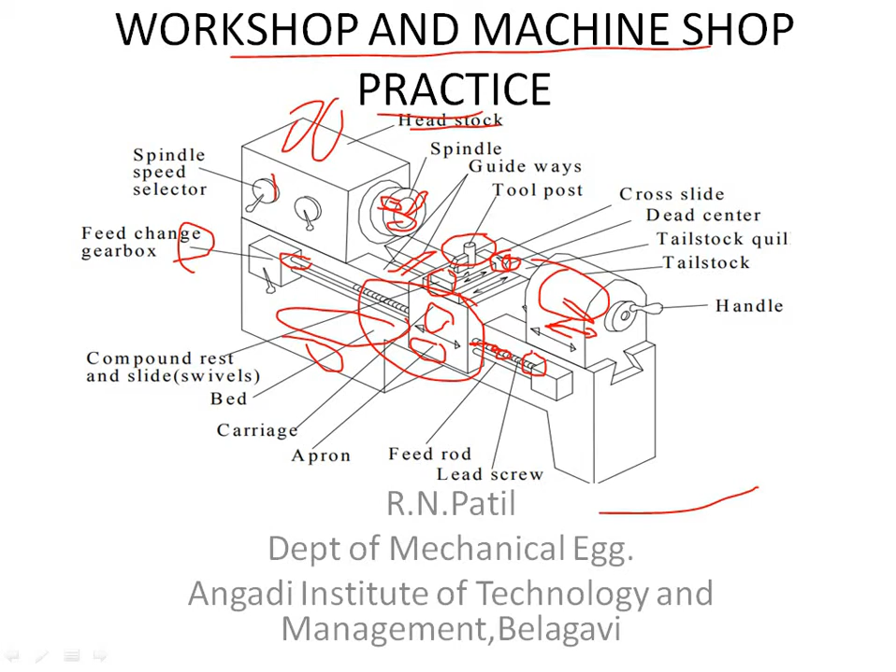And specification of lathe: metric thread pitches, lead screw pitch, longitudinal feeds, cross feeds, cross slide travel, top slide travel, tool section, tailstock sleeve travel, taper in sleeve bore, motor horsepower and RPMs, shipping dimensions, etc.

Types of lathe: engine lathes or center lathe, bench lathe, speed lathe and tool room lathes. So what is engine lathe? It is the most common type of lathe and is widely used in workshops. The speed of the spindle can be widely varied as desired, which is not possible in a speed lathe.

Bench lathe, a small lathe which can be mounted on the workbench. It is used to make small precision and light jobs. Speed lathe, it is named because of the very high speed of the headstock spindle. Speed lathe consists of headstock, tailstock and tool post. It has no gearbox. Application in wood turning, metal spinning and operations.

Types of lathe: tool room lathe and special purpose lathe, gap lathe, instrument lathe, facing lathe, floor turning lathe, heavy duty lathe. In that comes automatic lathe, a lathe in which the workpiece is automatically fed and removed without use of an operator. It requires very less attention after the setup has been made and the machine loaded.

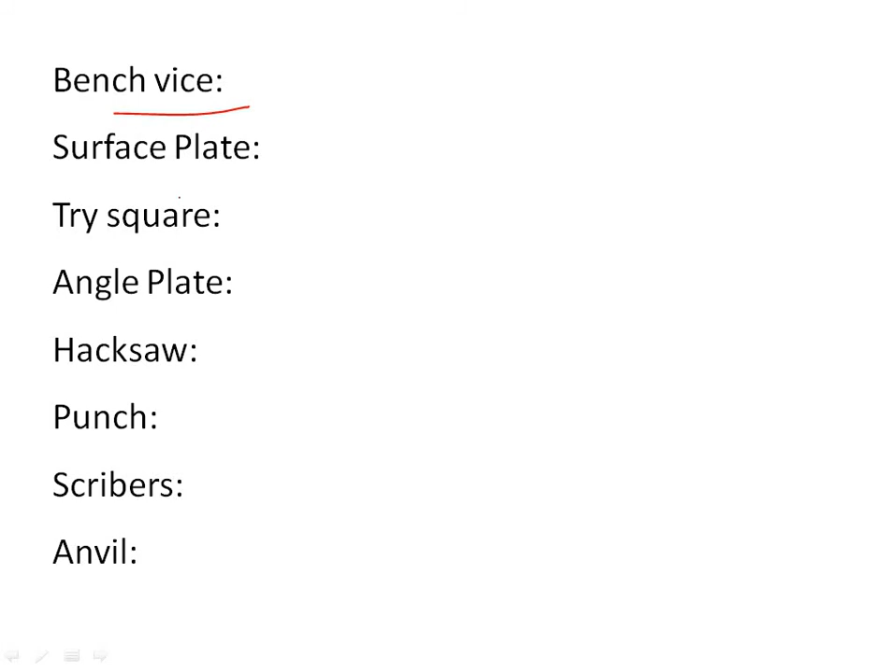These are the basic tools used in fitting shop: bench vise, surface plate, try square, angle plate, hacksaw, punch, scribers, and anvil. You all can see the tools we have shown here. The first basic thing is a scale, and this is the height gauge. This is the scriber, rectangular file, flat file, round file, and this is the try square, inside and outside calipers.

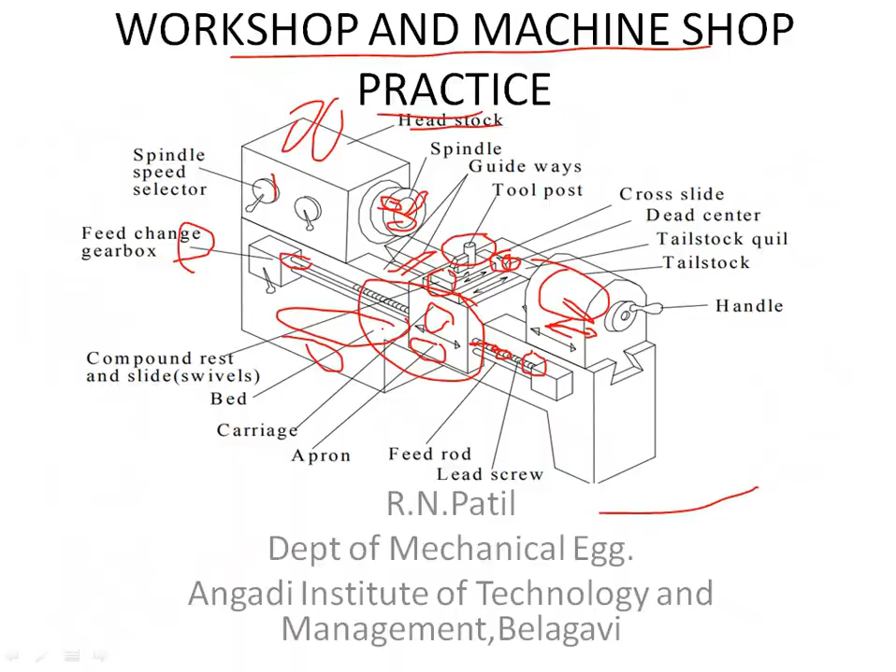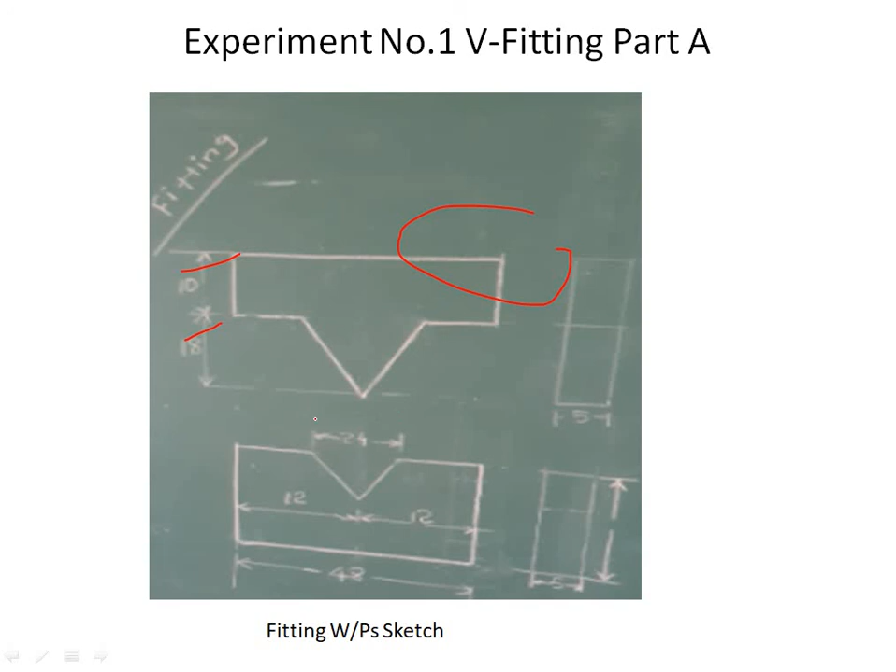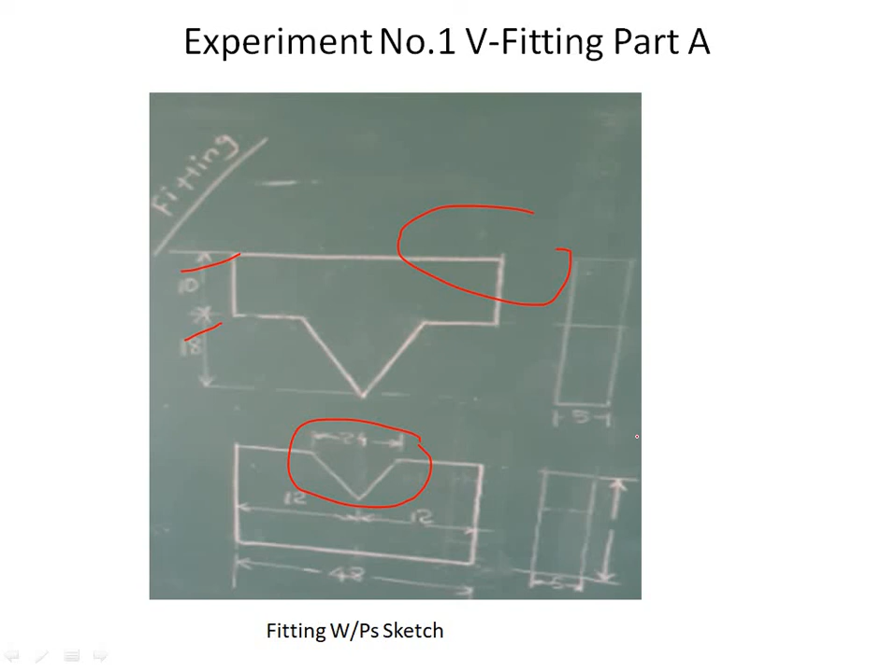So we have to cut in such a way that it should be in a V shape, both, and the upper portion should fit into this lower portion. Shortly, one is male and one is female, so the male should fit into the female. These are the things we are going to do in the fitting section. This is the part A fitting section in workshop and machine shop practice.